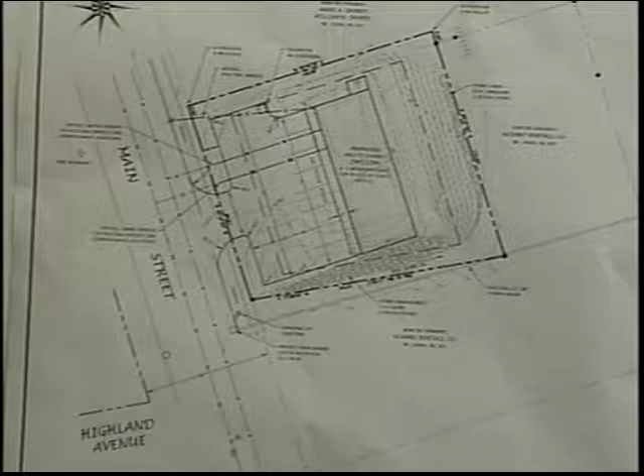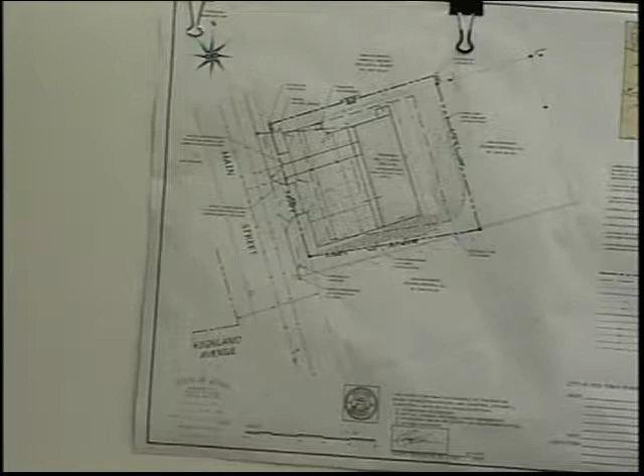Currently, the subject lot is undeveloped. It did house a multifamily dwelling that has been razed, and there was a detached garage associated with it. So right now the site is more or less a fielded, slightly wooded lot with a concrete slab and an existing curb cut.

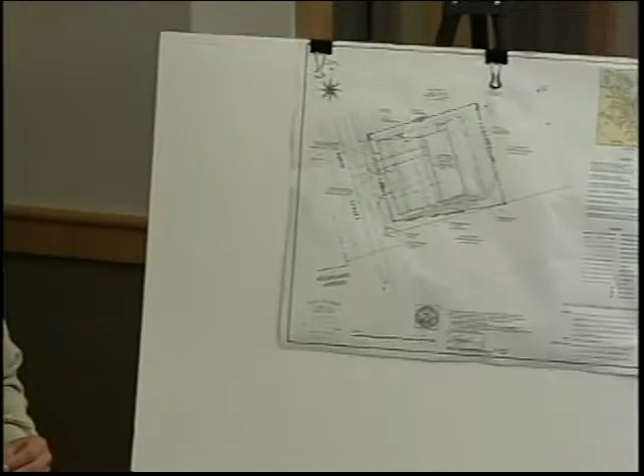What Mr. Wilcox is proposing to do is construct and install a 4-unit, 2-bedroom multifamily structure with associated paved parking, providing 2 parking stalls per unit. Conventionally, parking stalls are 9 by 18.

Mr. Wilcox likes to have his parking stalls a little wider, so we have 8 stalls at 10 by 18, with the conventional 24-foot travel aisle to give adequate maneuverability for passenger cars to move in and out.

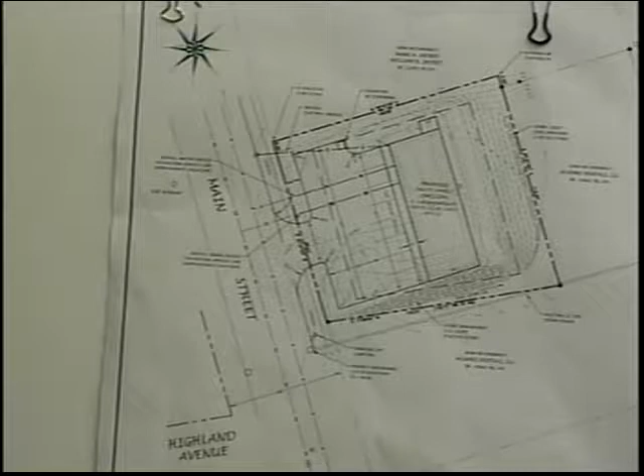The curb cut, the entrance for the parking lot, is very close to where the existing curb cut was, accessing the previous dwelling.

The topography for this site is very similar to all the lots along Main Street in that area, where you have this flat terrace, this flat area, and then it terraces down to a lower area.

When you look at the soils mapping for all these sites, included in your packet, the soil is I think an Estabrook, but it's an urban land-filled type of material. So this area is historically a bit of a fill area, and I think that's associated with this flat plateau and then the sloping down to the lower portions.

Just like the other project Mr. Wilcox constructed, we're going to take advantage of this flat upper terrace to avoid any excessive filling. So there'll be a nice flat area behind the building here. This is all pretty much 1% or less topography.

Proposed with a flat area here, 3-to-1 slope going down to a stone level spreader, which I'll address in just a second. The site is going to take advantage of the existing infrastructure associated with Main Street, with public sewer, public water.

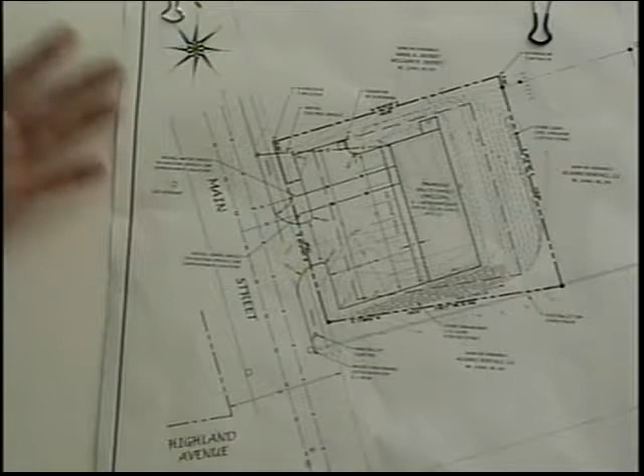For stormwater, there is a catch basin located in front of the site, just catty-corner from the subject lot, and you'll see a long stormwater pipe going from the roadway to the lower reaches behind this adjacent lot. We're not going to be utilizing any of the stormwater structures here.

So we're not going to be impacting it or asking it to have any more accommodation for stormwater. What we're going to do is shed the water a bit in this area here. It's going to be captured in a swale. There is an existing swale here now, but we're going to capture it in an on-site swale, stone-lined, and put it into a level spreader, spreading that stormwater along this whole length.

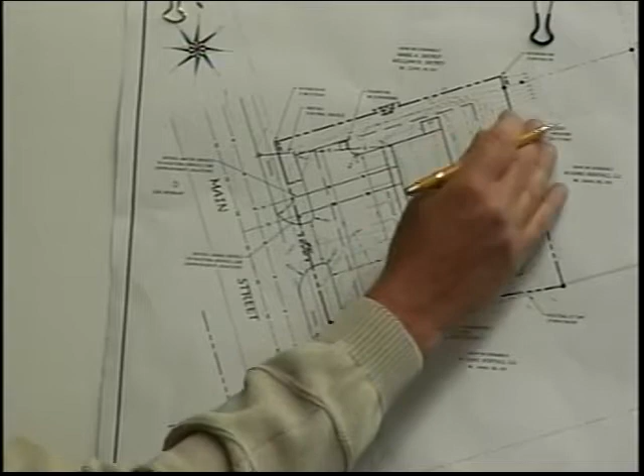So as far as the pre and post for stormwater, in the existing conditions, you have a point discharge here and another point discharge here. What we're doing is instead of having two concentrated areas, we're going to stretch it out and let it meander as sheet flow. We're turning the shallow concentrated flow into sheet flow, so we're not adding to the concentration here, we're actually spreading it out.

So you're going to put a rock outflow there? Exactly, a long one. What size is the aggregate going to be? I think I have a 3-inch diameter D50 stone, so the average is 3 inches. Sometimes it's more, sometimes it's less, but the average stone size is 3-inch.

We have a little turnaround area here, a notch out for the paved parking. That's where the dumpster is going to be installed or placed.

As far as site lighting, like the other project, we have a pole right in front of the subject lot - actually 2 poles - and we're going to have a lamp that goes onto the parking lot, so it's not going to shine onto any adjacent residential properties. It's not going to go into the road.

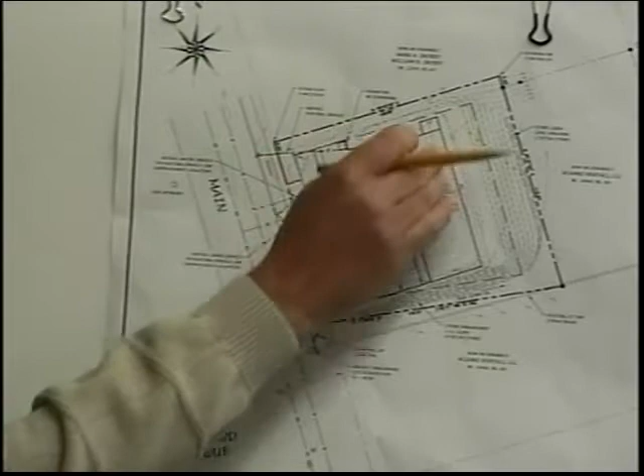And of course this is commercial here, and the Shoreys have been working with Mr. Wilcox on this project on both sides to make sure we had the required frontage for this lot, which I think is 105 feet required frontage. We have 105.4 feet, so the Shoreys conveyed a 6.5-foot strip to this lot to give it the required frontage for this number of units.

And the required area, I believe, is 12,000 square feet, and we have 15,007 provided.

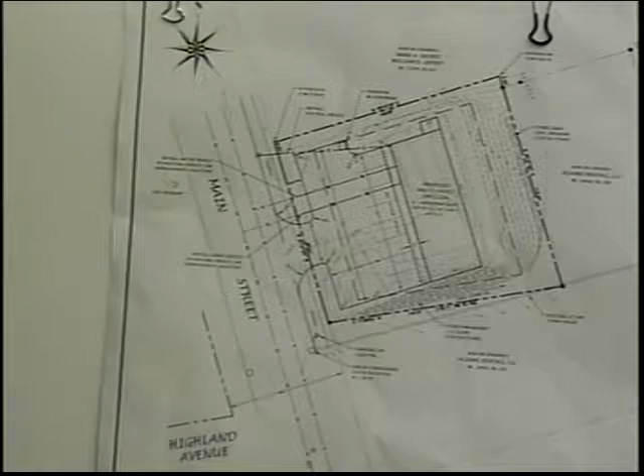So we look at some of the impacts here. We do have letters from the sewer district, and letters from the water district. For traffic, we have 8 parking stalls, which is not a big traffic generator. For solid waste, that's going to be handled by the owner, Mr. Wilcox - he's going to be under contract with the dumpster, so there's not going to be an impact on the municipality as far as solid waste handling.

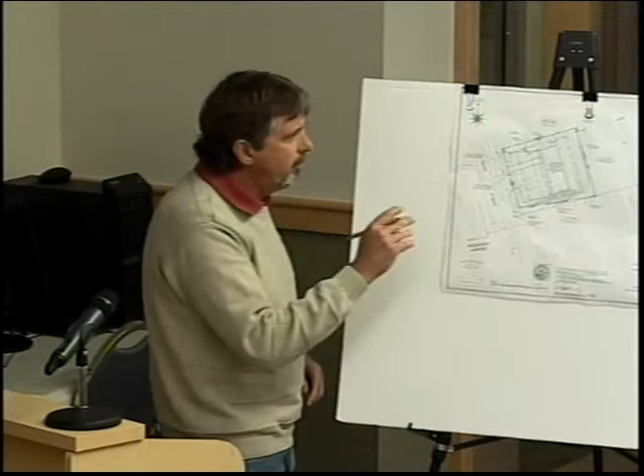For erosion control, you'll see in my packet that I've addressed it with erosion control mix, and I also put a detail in for the level spreader. There's also a note on the plan to ensure that before any construction activities, all areas down gradient of any earth disturbance will receive erosion control mix. He's placed some silt fence there now, I noticed.

Dave, has the fire department had a chance to get back with you on this? It's going to be a sprinkled building. Okay, so it's going to be a sprinkled building. Is the other project on Main Street sprinkled as well?

So I'm looking at impacts here for the municipality and how they're being addressed, and I think I've pretty much covered everything here. As for the capacity of the applicant, he has a pretty good track record already with recent projects very similar to this. The project's not in the floodplain, and we're not proposing outdoor sales - it's not of that nature.

We have provided the deeds in the packet. We have a stormwater management study and the erosion control details.

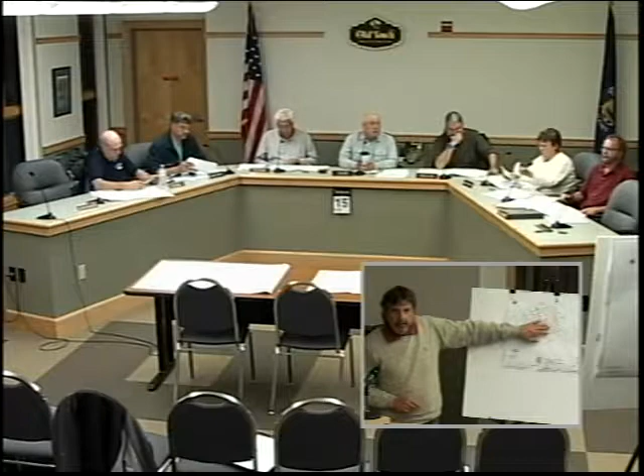As far as the foundation, which is what I'm depicting here on the site plan, it is meeting all the setbacks. And in the rear you've got another 15, 20 feet before you even hit a setback line. It certainly would add to the livability of the project. On my site plan I'm not showing the foundation per se. If you want to add that later, he'd have to get a building permit. That's a building permit issue. So it's not going to materially change the footprint or the setbacks. Absolutely not. So it's not something we need to be concerned about as a planning board?

Does this patio count towards the impervious? How big is the patio out back? Is that gonna count towards the impervious area of the property? It's stone. It's not going to add much. They were like 6 by 4 deep, just a little place to set a grill off the side. Certainly wouldn't have any impact on any impervious calculations. Is it going to be grassed back there beyond the patio? Yes, it's gonna be lawn. I mean, it's fine. We just ought to have accurate plans.

I think these plans are accurate. I think this thing that's being shown here is the canopies over the front doors. It's the other way around. But that's on the back, though. This is the canopies on the front.

No. Looking at it from the right, so you would turn the building. I believe those are, unless it's labeled wrong. It's looking from this direction, right? Yeah. I will concede that point. Good thing we've got engineers on board over here, because I'm confused.

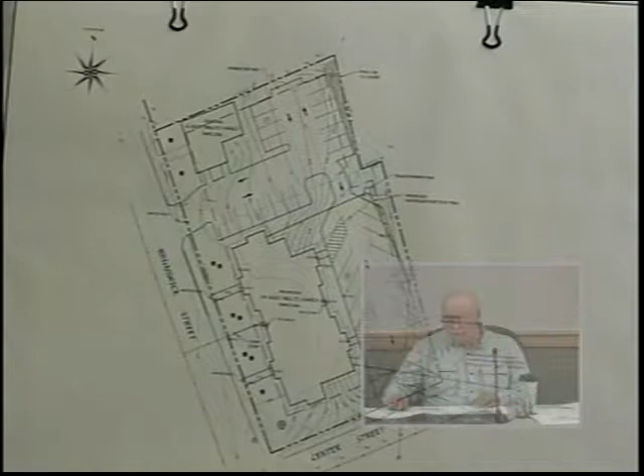That's totally up to you as well. Now, there is an egress onto Center Street. Egress onto Center Street only, and the thought pattern that Oscar had, and we had discussed it, if there's any queuing, it won't be out on Center Street, it'll be on their own property. So if they have to wait for traffic, they're not waiting to make a left turn in. Right. And the sight distance is adequate there? There was an existing access there.

Right. You mind if I just introduce? Go right ahead. Okay, so what we have here on your site plan, you'll see my setbacks. We have two parcels. We have this parcel that had the multifamily that burnt down, and in the same ownership we also have this existing 4-unit multifamily dwelling that's still there. The structure before you has the same amount of units that the existing one had that burnt down. To accommodate this new building as well as this 4-unit here, we have 18 units total. Needed to come up with 36 parking stalls.

I'm not quite sure how that layout worked existing, if it even had 36 parking stalls. I don't know for sure. I don't believe it did. But anyways, utilizing what's there now, this is approximately where the building is. You have this flat spot up at the top here. The difference being, I don't believe the other building had the level where you can walk in this way, and then it goes down a story and you can walk out this way. I think the people parked here and walked around. They did have interior stairwells that went down. Okay. And did they have a walkout this way as well? Yes, they did. I remember seeing one. Okay, so I'm duplicating that.

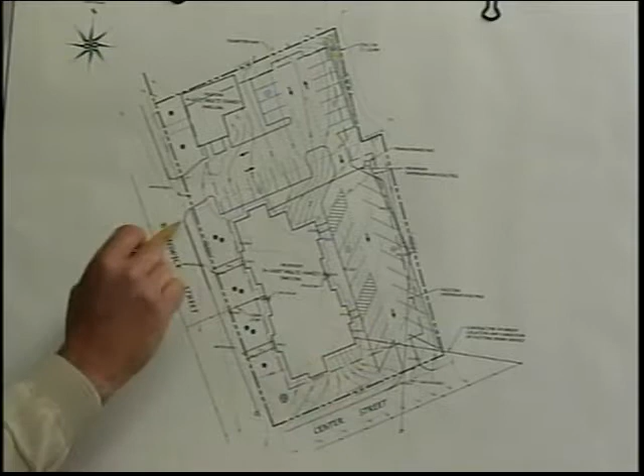But the difference between this site plan and what is existing out there now is, you see these steep contours right here. To get the 36 stalls that I need, I'm bringing this parking lot, which is close to being on that edge of pavement that's there now, and I'm cutting in a little ways, so you really have a walkout type of scenario right here. So I needed to grab this little bit of embankment to get this herringbone 45-degree alignment. As you can see, I've used up pretty much all the site to get my 36 stalls, to meet today's parking lot dimensions.

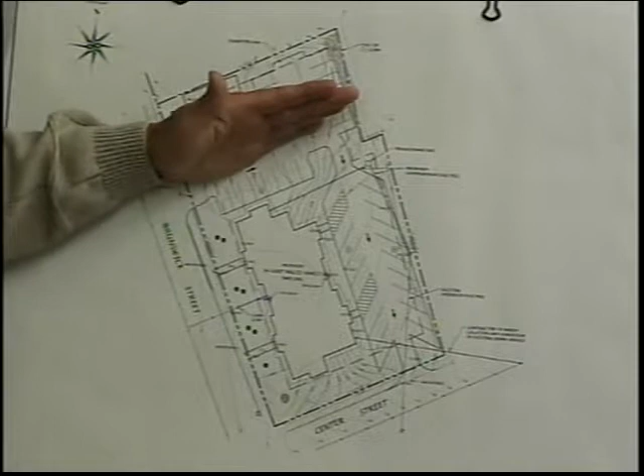And I think that's probably the difference between this and previous, is that that was grandfathered, and it probably didn't have some of the same travel aisle dimensions and parking stall dimensions that I'm required to do with a new layout. With that 45-degree herringbone alignment, you only have one-way traffic. So that's why I have this one-way out. You have two-way traffic here for the 8 stalls that go along. This gives you the parking stalls for here. This gives you the parking stalls, more or less, for this building right here.

So the people parking in the back actually don't really have an option to go out on Brunswick Street. They've got to go out to Center. Yes, that is true. And there's sufficient sight distance. Yes. I've asked that before, I know.

The reason I'm a little sensitive is because I T-boned a kid right at that intersection who ran the stop sign in 2013. I was not happy about it, but since then, they put in the blinking lights. It's a lot better. Of course, the kid didn't have any brakes in his Jeep, which is neither here nor there.

I will say, Ted, that I walked up and down pretty much the center of this road with the survey equipment, making sure I wasn't going to get run over, because it never really slows down there as far as volume of traffic. I had plenty of sight distance to get out of the roadway before I got run over when I was trying to take a shot. Because from there, you have Shirley Street, the entire post office lot. It's a busy spot. Oh, yes. And like I said, if somebody runs a stop sign or they're going too fast there, then it's not the fault of the design, it's just the fault of the people driving.

So Dave, can I ask a quick question? Informally, when we talked about this last time, you had indicated that other apartment was going to be torn down. Does that need to come down to help with the square footage, or are we clear with that? No, it's fine. With the R2 standards that we have to use here, we have enough property, because he was going to tear that down to see if he could get more units. He was going to end up with the exact same number, so instead of tearing down a functional building. Sure. And this is the original footprint. Yes. They have removed the lot line between the two, so this is going to become one single property.

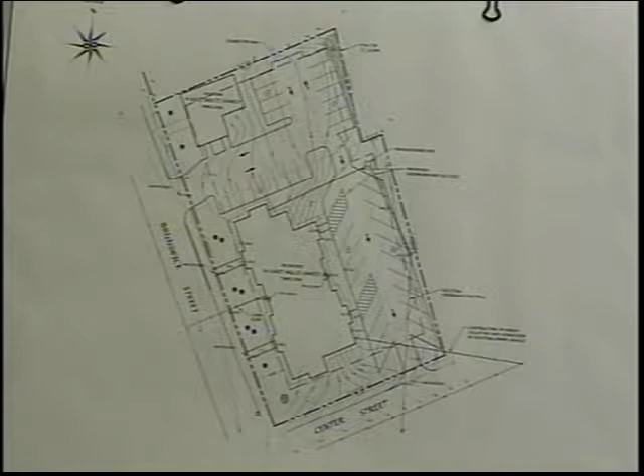I don't see them, the 10-foot canopies, is that gone now? That's gone. Now it's just... And the canopies out at the back doors that went into the parking lot, those are gone, and it's gonna be a sprinklered building. Yes. So I guess the thing before the board is, if it's changed a quarter of an inch somewhere, we could certainly argue that it's not the same footprint and it needs a site plan. And again, I have no problem with that at all. Oscar's got this much done, the applications are done.

We need to do a full site plan review? I have no problem with that. I think it's going in the original configuration, so that's fine. But Oscar made a reference to a couple things in the back. Are there gonna be retaining walls there? I can't remember if there are retaining walls. No. So you're just gonna terrace it down and it doesn't need it? Yeah, we did get the grading to work. Okay. So essentially there's not gonna be any retaining walls required. This is gonna be quite flat, actually, right here. And I'm digging into here.

Right. So you don't need retaining; the foundation wall will be your retaining wall. Oh, I see, okay. Yeah, exactly. So it'll all be stabilized. And those big rocks that are there now will be moved, obviously. They won't be part of the site. No, no. That was a big argument I had with the insurance companies. They wanted to utilize that same foundation, and I just couldn't do that.

Oh, 1800s foundation, and it's not a poured foundation, right? No, it's granite slabs. It looked that way to me. Granite slabs. I don't understand that. Yeah, from an engineering point of view, I'm sure you would agree, it's not. Well, you can make them work, but there would be more you'd have to do. Right. I have nothing. All right, well, we aren't deciding anything here.